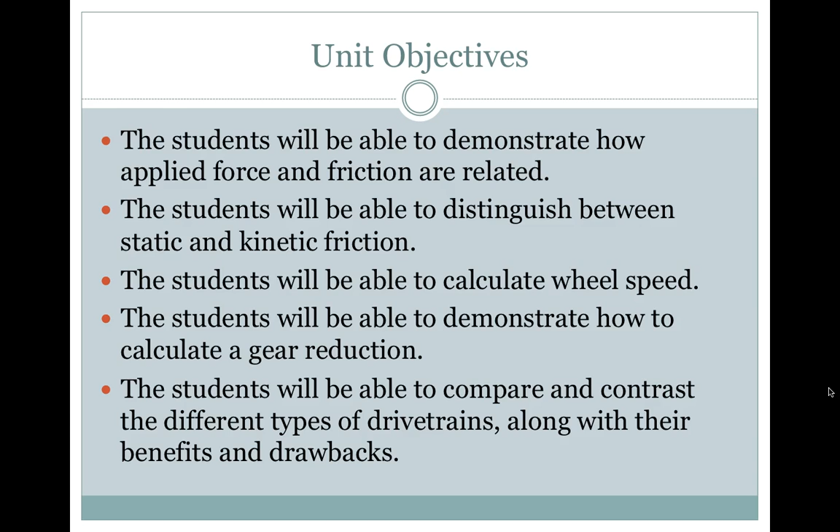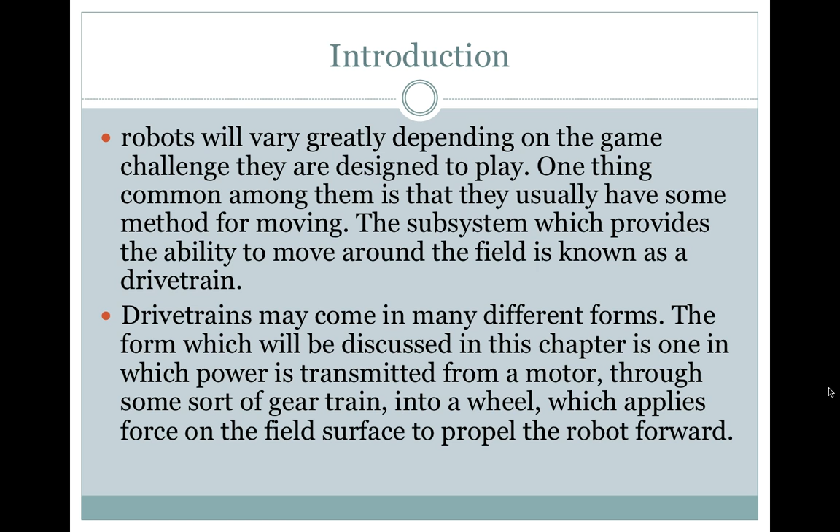Introduction. Robots will vary greatly depending on the game challenge they are designed to play. One thing common among them is that they usually have some method for moving. The subsystem which provides the ability to move around the field is known as the drivetrain. Drivetrains may come in many different forms. The form discussed in this chapter is one in which power is transmitted from a motor through some sort of gear train into a wheel, which applies force on the field surface to propel the robot forward.

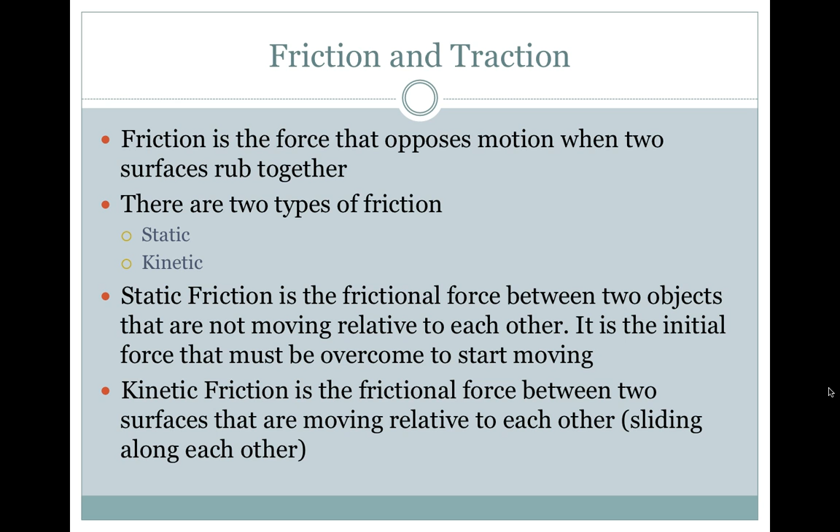Friction and traction. Friction is the force that opposes motion when two surfaces rub together. There are two types of friction: static and kinetic. Static friction is the frictional force between two objects that are not moving relative to each other; it is the initial force that must be overcome to start moving. Kinetic friction is the frictional force between two surfaces that are moving relative to each other, or sliding along each other.

There are two factors which determine the maximum frictional force that can occur between two surfaces: how grippy the surfaces are, known as the coefficient of friction, and how hard the two surfaces are being pushed together, known as normal force. The maximum force of friction between two surfaces equals the coefficient of friction of these two surfaces multiplied by the normal force holding them together: maximum force of friction equals coefficient of friction times normal force.

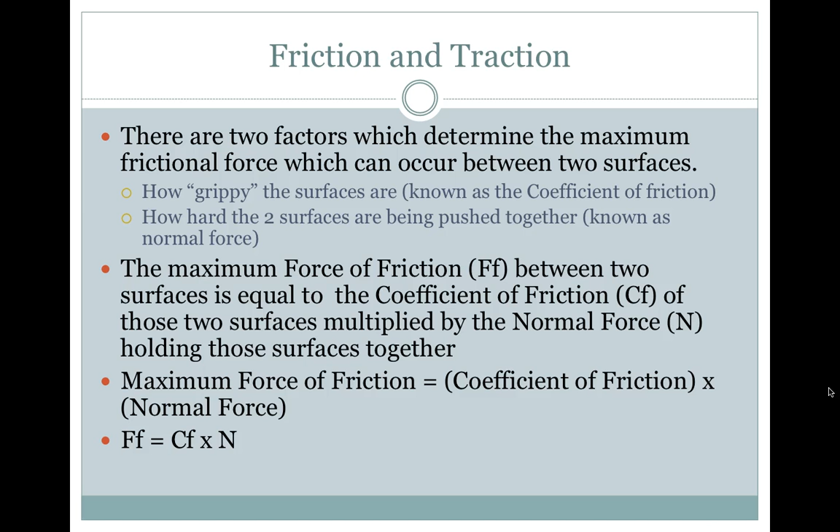Coefficient of friction: a constant that describes the grippiness of two surfaces sliding against each other. This is not a function of one surface, but two surfaces. Slippery objects have very low coefficients of friction, while sticky objects have very high coefficients of friction. Each pair of materials will have a coefficient of static friction and a coefficient of kinetic friction. One shouldn't confuse pure friction with actual sticky surfaces like tape or high friction coatings that bind other surfaces together; these surfaces almost need to be looked at as just being joined as one.

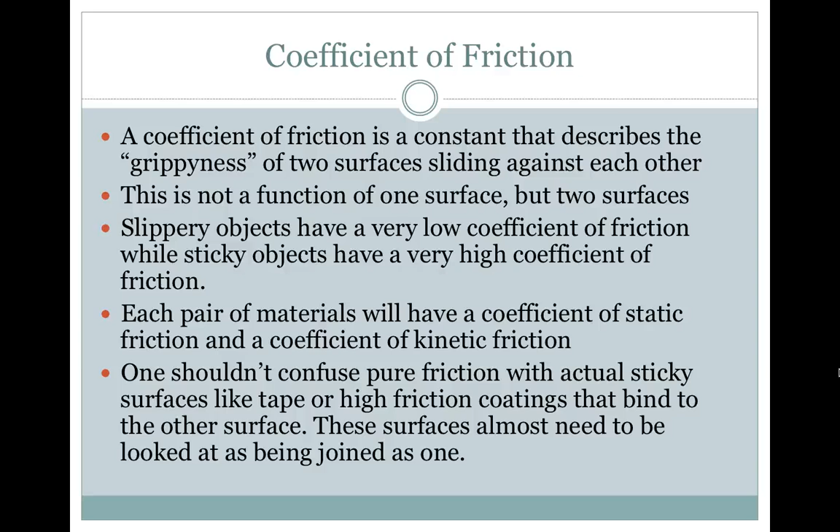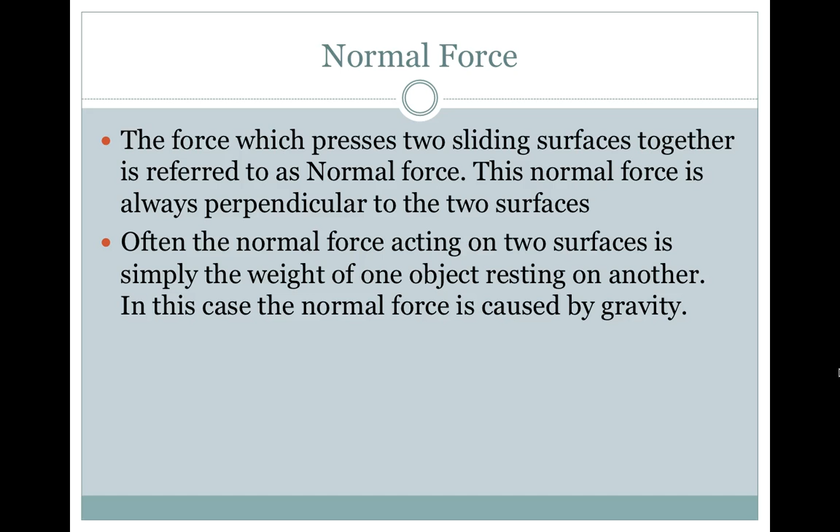Normal force: the force which presses two sliding surfaces together is referred to as normal force. This normal force is always perpendicular to the two surfaces. Often, the normal force acting on two surfaces is simply the weight of one object resting on another. In this case, the normal force is caused by gravity.

Traction can be defined as the friction between a drive wheel and the surface it moves upon. It is the amount of force a wheel can apply to a surface before it slips. A wheel will have different traction on different surfaces.

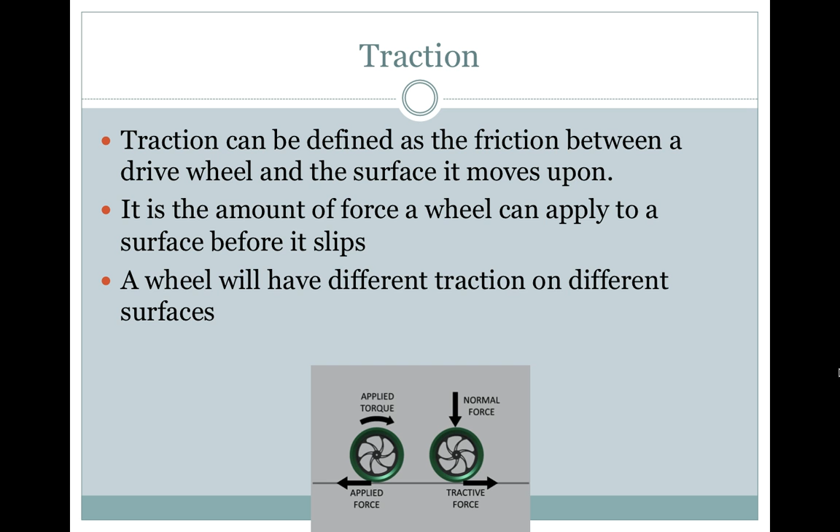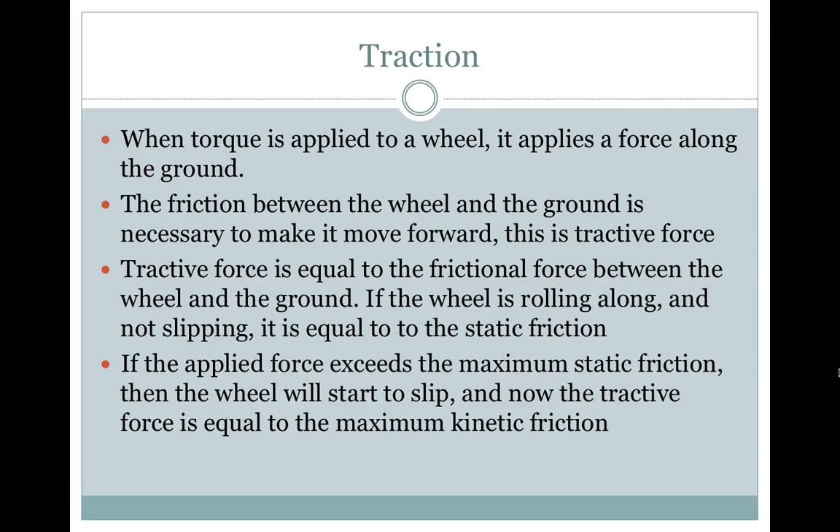When torque is applied to a wheel, it applies a force along the ground. The friction between the wheel and the ground is necessary to make it move forward; this is tractive force. Tractive force is equal to the frictional force between the wheel and the ground. If the wheel is rolling along and not slipping, it is equal to the static friction. If the applied force exceeds the maximum static friction, the wheel will start to slip, and now the tractive force is equal to the maximum kinetic friction.

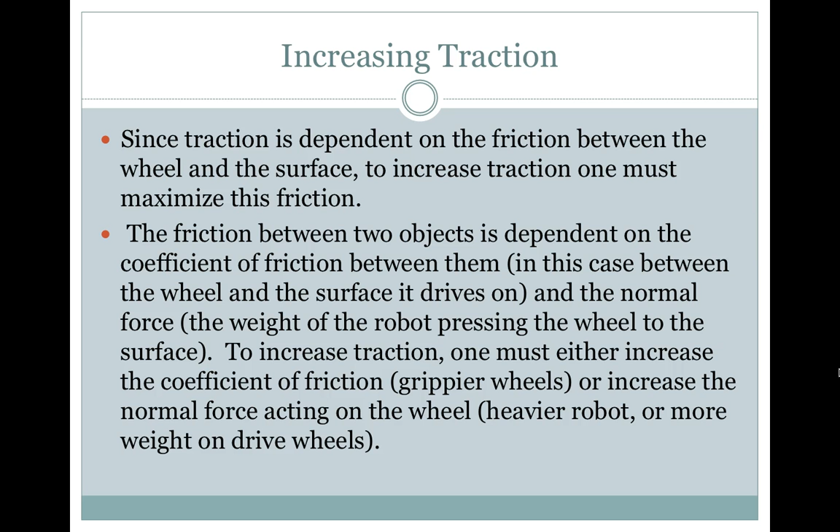Increasing traction: since traction is dependent on the friction between the wheel and the surface, to increase traction one must maximize this friction. The friction between two objects is dependent on the coefficient of friction between them, in this case between the wheel and the surface it drives on, and the normal force, or the weight of the robot pressing the wheel into the surface. To increase traction, one must either increase the coefficient of friction using grippier wheels, or increase the normal force acting on the wheel—a heavier robot or more weight on the drive wheels.

Drivetrain terminology: the drive wheel is a wheel to which power is transferred and used to propel the robot forward. Not all wheels are drive wheels; some wheels do not help to move the robot.

Turning point: the point around which a robot is turning. Turning scrub is the friction caused by wheels dragging sideways along the ground as the robot turns, and it resists the robot turning.

A zero radius turn is when a robot turns in place without moving forward. In a zero radius turn, the turning point of the robot is at the center of the robot. Chassis: the structure of a robot which holds the wheels, motors, and gear train in place.

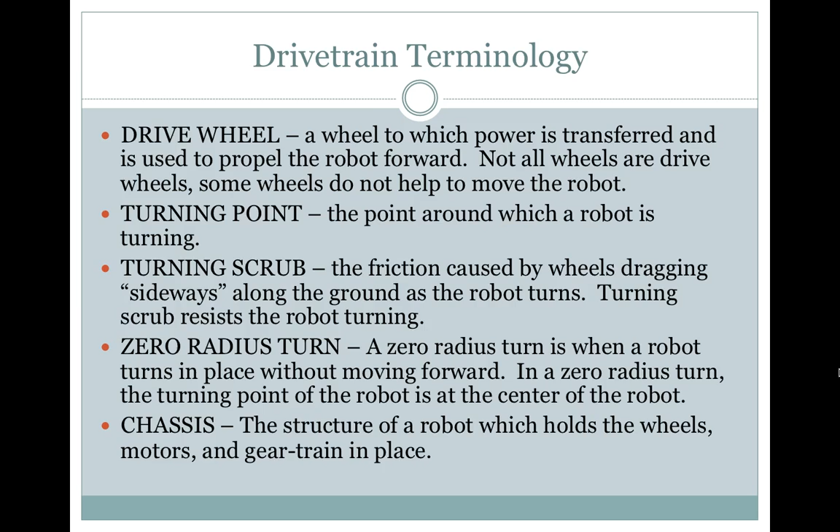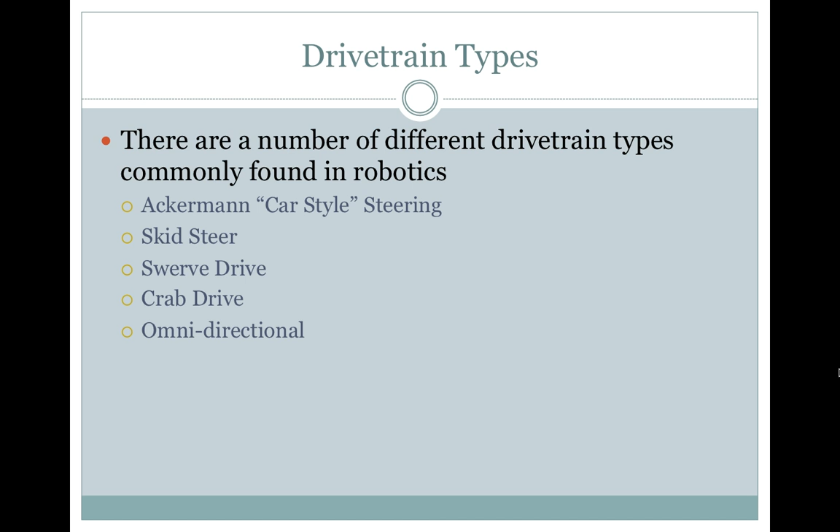Drivetrain types: there are a number of different drivetrain types commonly found in robotics: Ackermann or car-style steering, skid steering, swerve drive, crab drive, or omnidirectional.

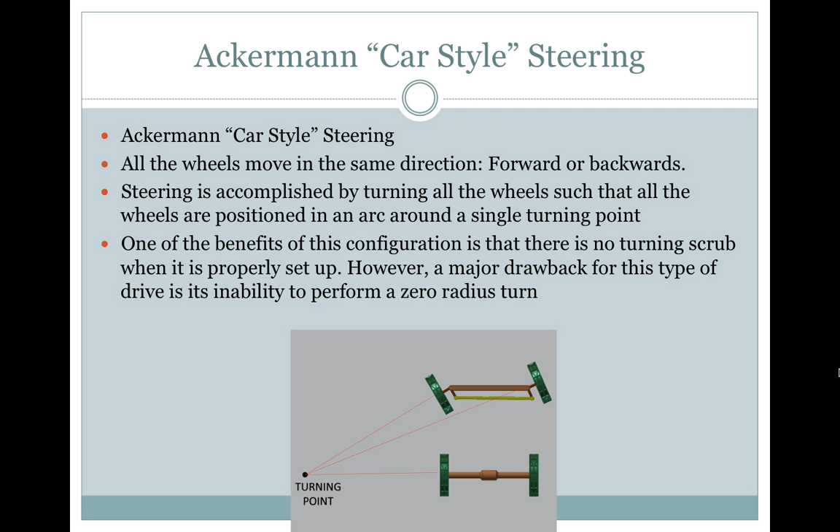Ackermann car-style steering: all the wheels move in the same direction, forward or backwards. Steering is accomplished by turning all the wheels such that they are positioned in an arc around a single point. One benefit of this configuration is that there is no turning scrub when properly set up. However, a major drawback is its inability to perform a zero radius turn.

Skid steer: this style is sometimes referred to as tank drive, since it's commonly used in tanks. The wheels on the right side and the left side of the drive are powered by separate motors. Steering is accomplished by varying the speed of the different sides. This type of drivetrain is capable of zero radius turns.

The robot driver would simply power one side forward and the other side in reverse. This type requires two motors but does not require a specific actuator for steering. Both motors are used when going straight, so all power can be used for acceleration or pushing.

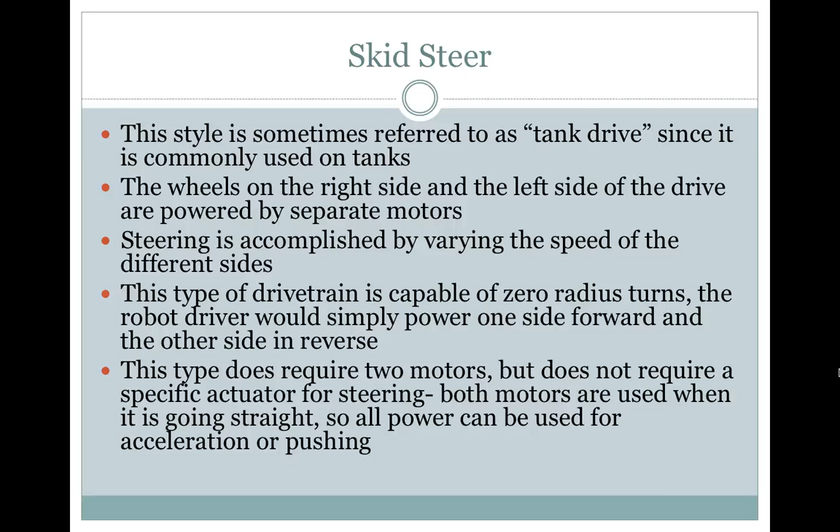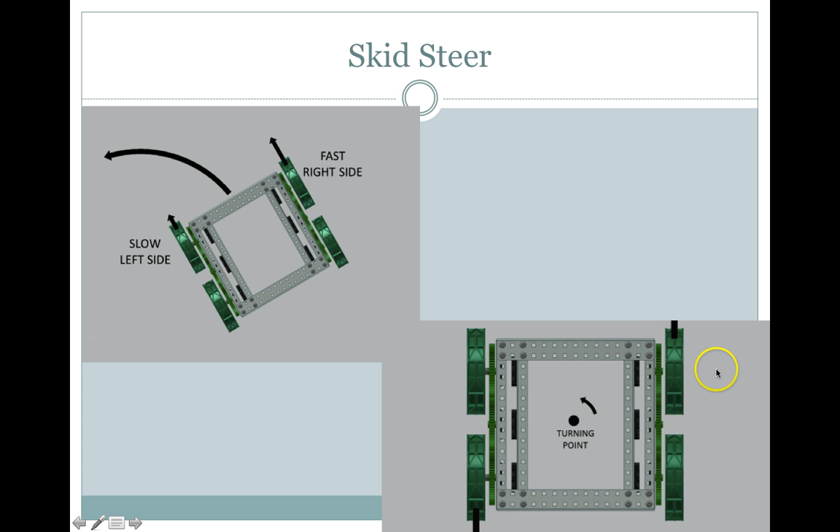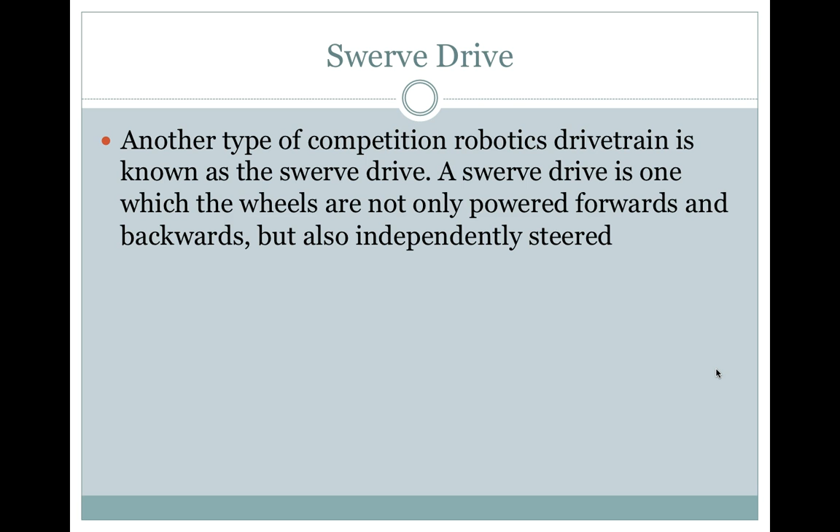Swerve drive is another type of competition robotics drivetrain, one in which the wheels are not only powered forwards and backwards, but also independently steered. A crab drive system is one which utilizes two sets of skid steer drivetrains, each pointed in a different direction.

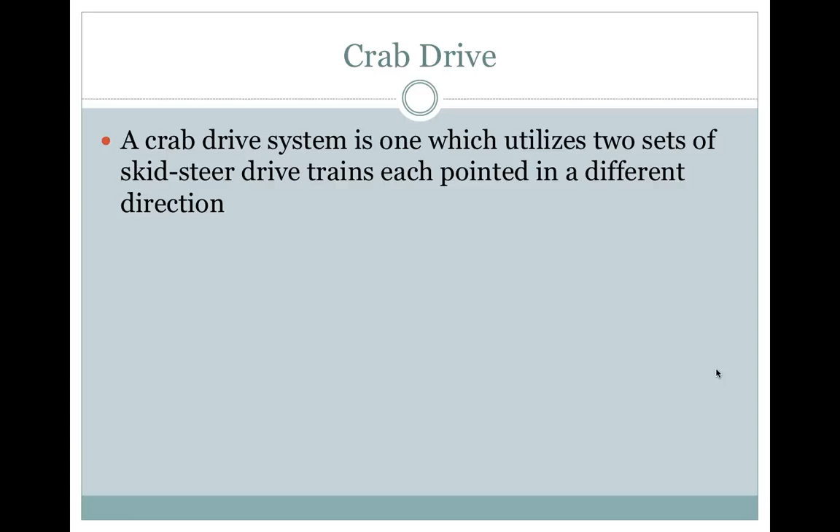Omnidirectional drivetrain: a drivetrain that can move in any direction at a given moment without waiting for wheels to steer is called an omnidirectional drivetrain. These drivetrains use special wheels called omniwheels, which have small rollers around the perimeter that freely spin perpendicular to the wheel's rolling direction.

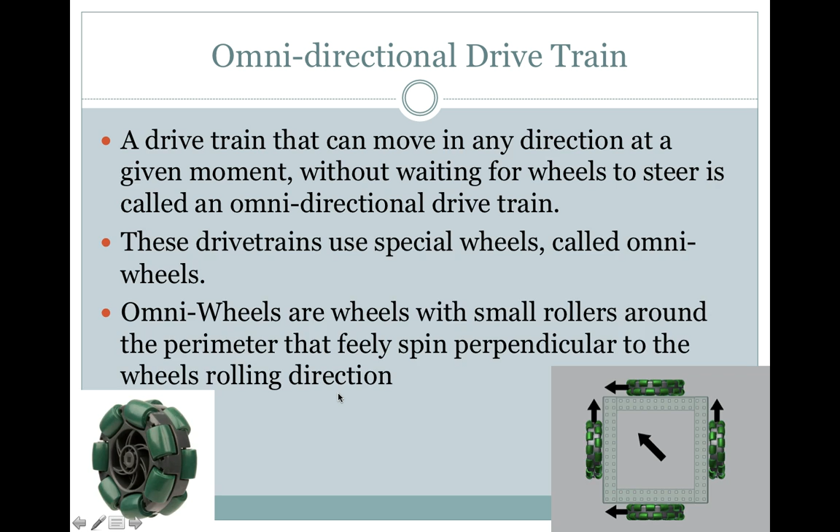Each one of these wheels is moving in a different direction, which causes the overall robot to move in a diagonal direction. One problem with omnidrives is the requirement for multiple motors, with only some of the motors contributing to the robot's forward motion at most times.

Drivetrain geometry and design: one of the most common types of robot drivetrain is the skid steer drivetrain. This type consists of two independent sets of powered wheels, one on each side of the chassis. This drivetrain is capable of a zero radius turn if the sides are run at the same speed in opposite directions.

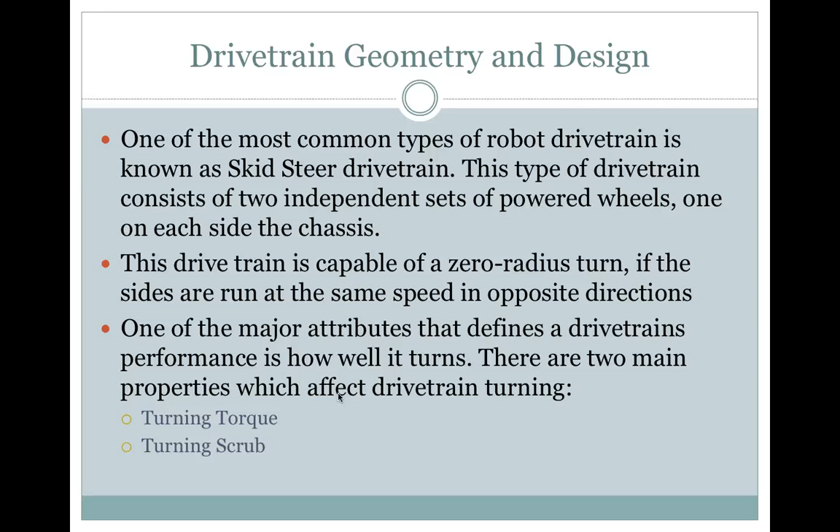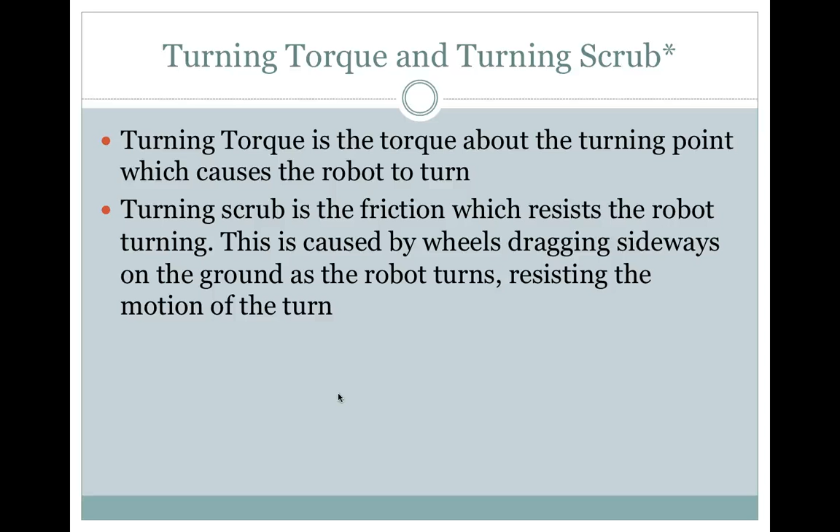One of the major attributes that defines a drivetrain's performance is how well it turns. There are two main properties which affect drivetrain turning: turning torque and turning scrub. Turning torque is the torque about the turning point which causes the robot to turn. Turning scrub is the friction which resists the robot turning, caused by wheels dragging sideways on the ground as the robot turns, resisting the motion of the turn. So how does one reduce turning scrub when designing a turning drivetrain?

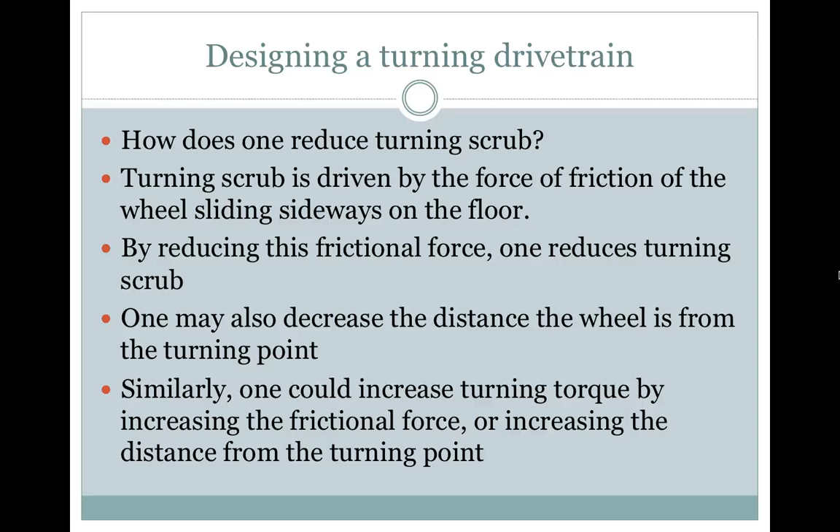Turning scrub is driven by the force of friction of the wheel sliding sideways on the floor. By reducing this frictional force, one reduces turning scrub. One may also decrease the distance the wheel is from the turning point. Similarly, one could increase turning torque by increasing the frictional force or increasing the distance from the turning point.

Notice that to decrease turning scrub, one must decrease the wheel friction in the left-right direction. To increase torque, one must increase the friction of the wheel in the front-back direction. It is difficult to modify the friction of a wheel in one direction without affecting the other, so it is usually best to modify the geometry of the robot chassis to help improve the robot turning.

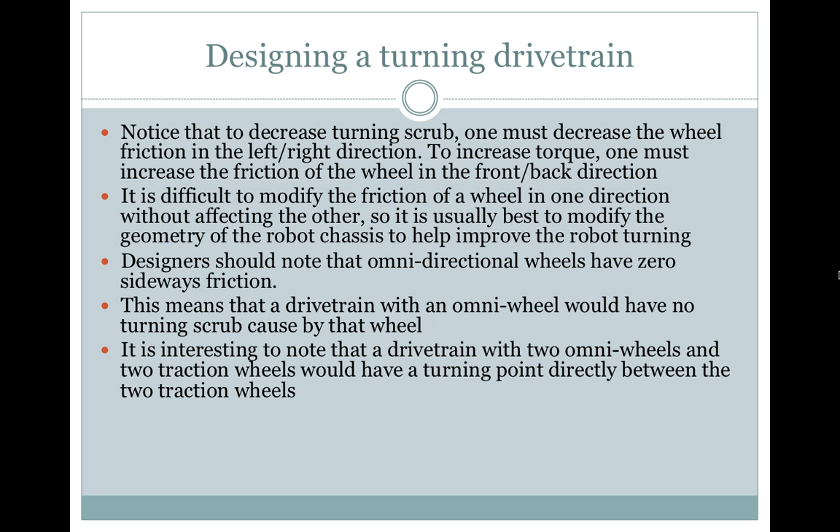Designers should note that omnidirectional wheels have zero sideways friction. This means that a drivetrain with omni-wheels would have no turning scrub caused by that wheel. It is interesting to note that a drivetrain with two omni wheels and two traction wheels would have a turning point directly between the two traction wheels.

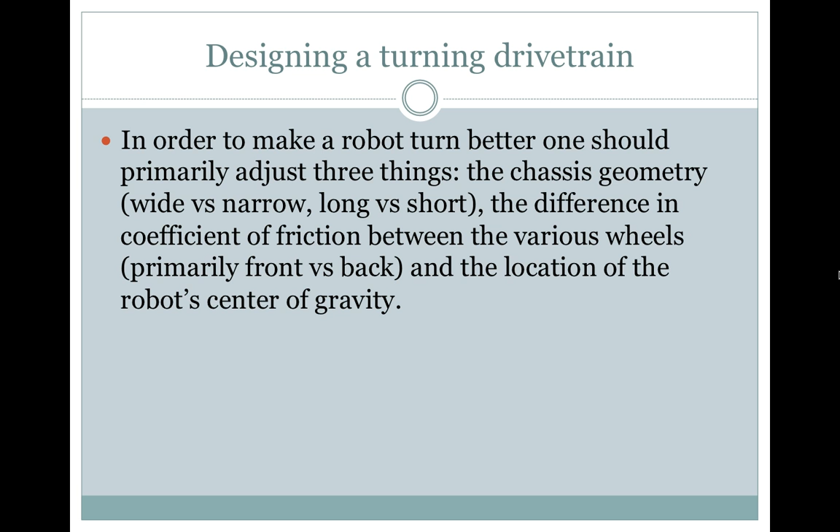In order to make a robot turn better, one should primarily adjust three things: the chassis geometry, wide versus narrow, long versus short; the difference in coefficient of friction between the various wheels, primarily front versus back; and the location of the robot's center of gravity.

Gear train design. The gear train represents the part of the drivetrain that transmits power from the motor to the wheel. Wheel speed: the first concept to understand is how to figure out how fast the robot moves across the field based on how fast the wheel is spinning.

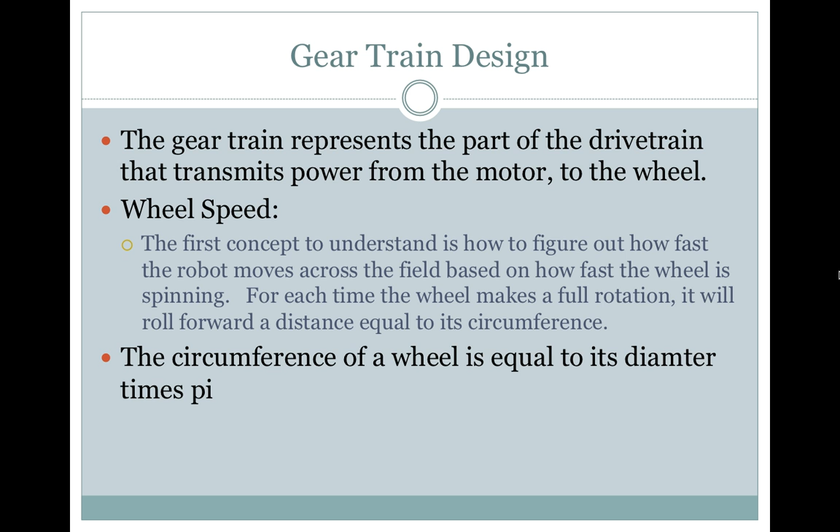For each time the wheel makes a full rotation, it will roll forward a distance equal to its circumference. The circumference of a wheel is equal to its diameter times pi. Once one knows the circumference of the wheel, it is possible to calculate how fast the robot is traveling based on the wheel's rotational speed.

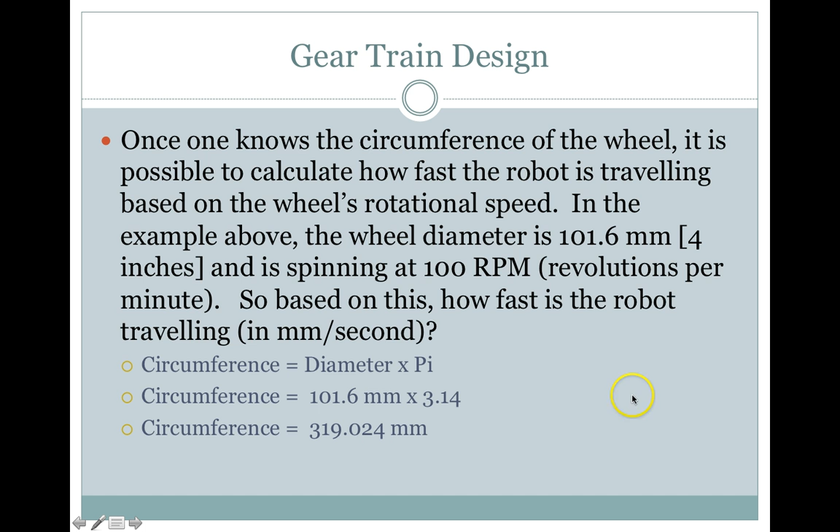In the example above, the wheel diameter is 101.6 millimeters, or 4 inches, and is spinning at 100 revolutions per minute. So based on this, how fast is the robot traveling in millimeters per second? First, we calculate the circumference: diameter times pi. We know that the diameter is 101.6 millimeters times 3.14, which gives us a circumference of 319.024 millimeters.

So the robot moves 319.024 millimeters per one wheel revolution. The wheel is moving at 100 revolutions per minute, or 100 revolutions per 60 seconds. From this, one can calculate the linear ground speed of the robot: 319.024 millimeters in one revolution times 100 revolutions every 60 seconds. Our revolutions cancel out, and we multiply across the top and divide by the bottom.

So we're going to multiply 319.024 times 100, then divide it by 60, and we get 531.707 millimeters per second. So the robot is moving about 532 millimeters per second, or 0.532 meters per second.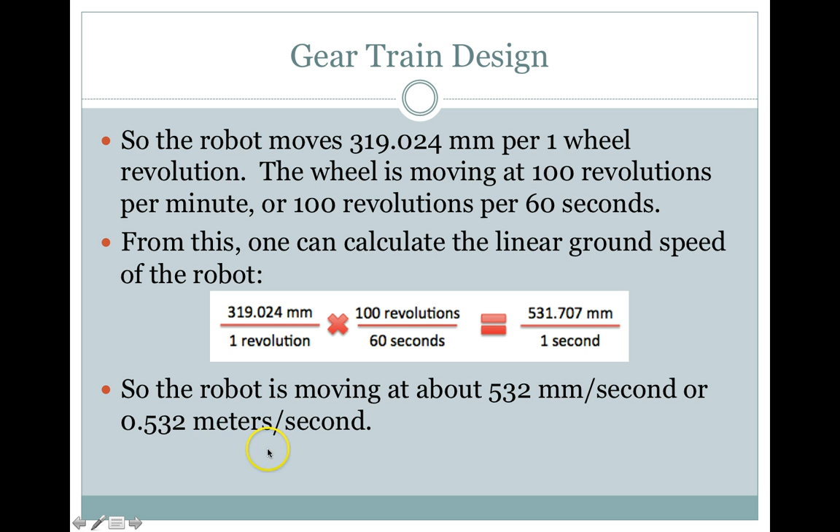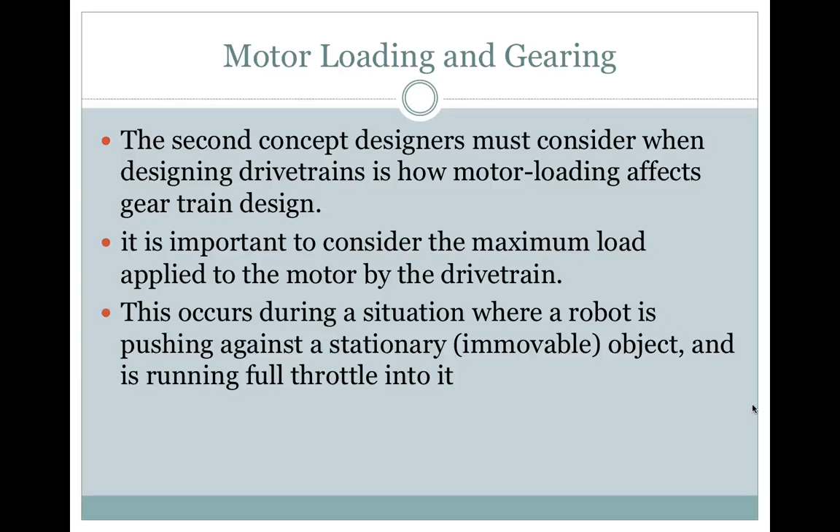Motor loading and gearing. The second concept designers must consider when designing drivetrains is how motor loading affects the gear train. It is important to consider the maximum load applied to the motor by the drivetrain. This occurs during a situation where a robot is pushing against a stationary object and is running full throttle into it. The first step is determining how many wheels are acting as a brake on the gearbox.

Only wheels directly linked through gearing or chain will apply load to the gearbox and motor. The second thing to consider is to determine how much of the robot's weight is resting on each of those wheels. The traction between the wheels and the floor is dependent on the normal force pressing them together. It is important to design the gearing such that the load applied on each motor is not higher than the motor limit.